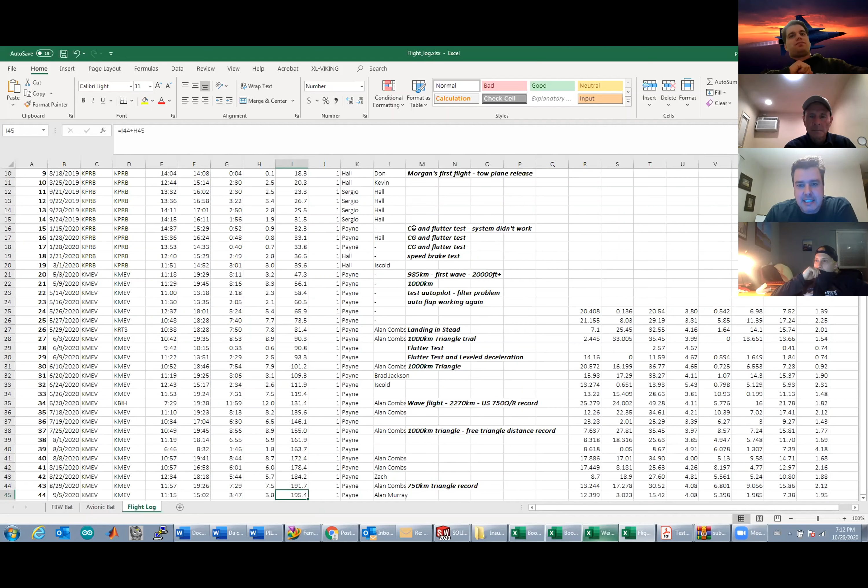In the middle of those flights, we did a lot of testing. Some tests for very specific parts of the airplane, but some just operational tests, just go fly, and having Jim try high performance flights just to see how the airplane behaves. And it was actually pretty successful.

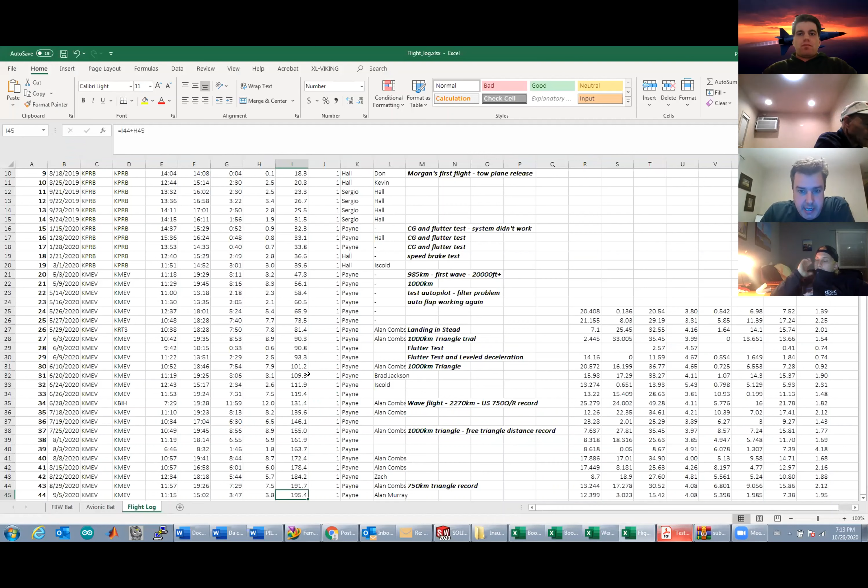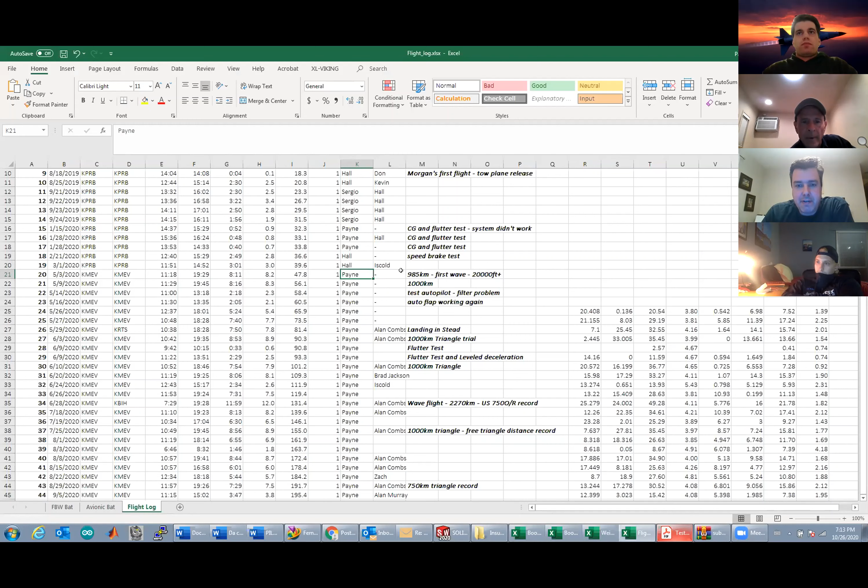The first day that I got there was actually the last flight that I did with Morgan. The first day, Jim just got a wave, and it was about a 1,000K flight, a very fast one. Then the next day he did 1,000K, not a triangle, but a normal 1,000K. Then we did a 1,000K triangle, and we ended up a little bit short, had to land at Reno Stead Airport.

That was actually very funny for me because I was always involved with race planes, and a big dream of mine was to take an airplane to Reno. So it was my first airplane that I took to Reno, not a race one, but a glider. And then a few days later, he did the 1,000K triangle, which allows you to do 3 US records.

Then a few days later, the big wave flight was actually 2,270K, but we lost avionics at the end of the flight, and we had to throw one leg in the trash because of the 5 turning points. That flight gave us a 750 out and return record. And all those records are US records for the multi-seat open class. And then later he did another 1,000K triangle, and the very big one last time was a 750K triangle. So a lot of big flights.

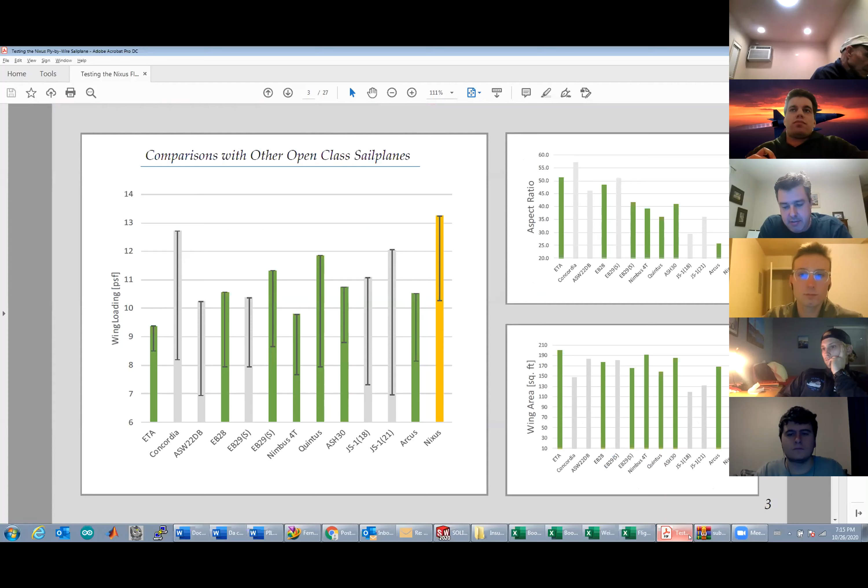But we tried to do that with as much engineering as we could use. So that's what I want to show a little bit today. If you guys have any questions, just open your microphone and ask whatever you want. Let's do this more like a conversation than a lecture. I'm gonna skip this because we just explained the project, and if you don't know the details, we can talk about them later. Let's concentrate on the testing.

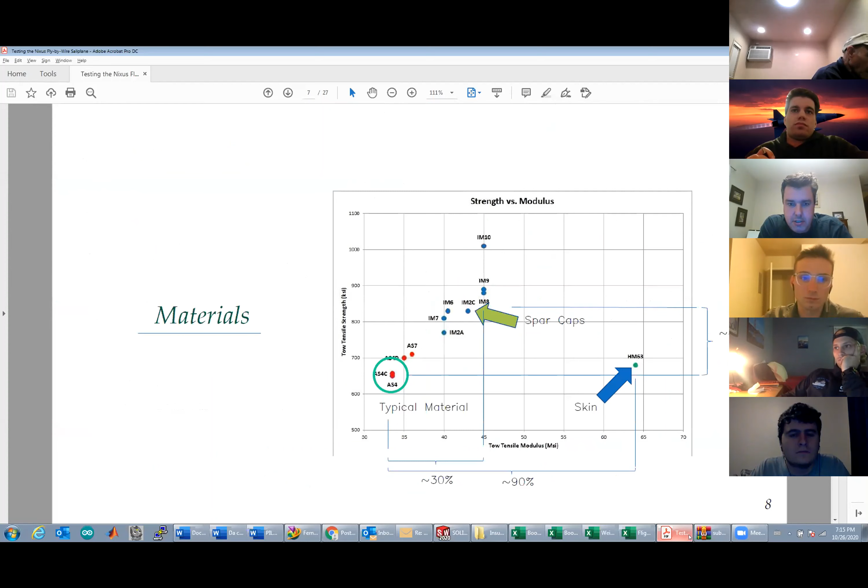And everything that's going on in those computers, I can save. So I have all the information that goes to the fly-by-wire and comes back from the fly-by-wire. All the sensors that I use on the fly-by-wire go to those computers. I have that information. So this is one of the big sources of data that I have on the airplane.

This data is being recorded at, I would say, something between 10 and 20 hertz. It's asynchronous, so it can vary a little bit. But let's say I have data here at least at 10 hertz, which is pretty good for the dynamics that we are looking for on a glider.

You can imagine a 7-hour, 8-hour, 10-hour flight. The amount of data that this generates is huge. So going back and digging into the data sometimes represents a big challenge for us.

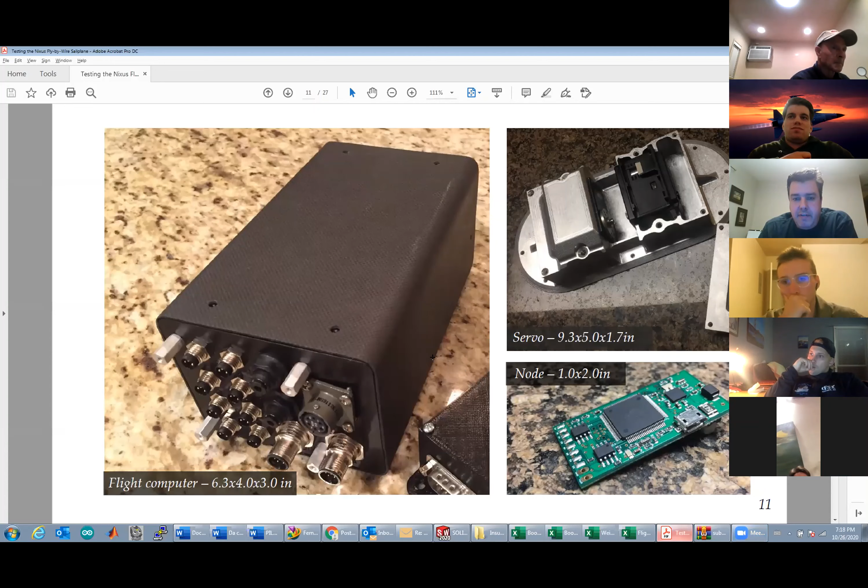I actually lost data for a very stupid reason. There is an SD card. The SD card has a file that sets the baud rate for the data logger, and I just saved the wrong file, you know. And when I lost that data, having the IGC file was very, very useful to try to reconstruct what I didn't have. So I have one flight where I had to do that, and it was very, very useful.

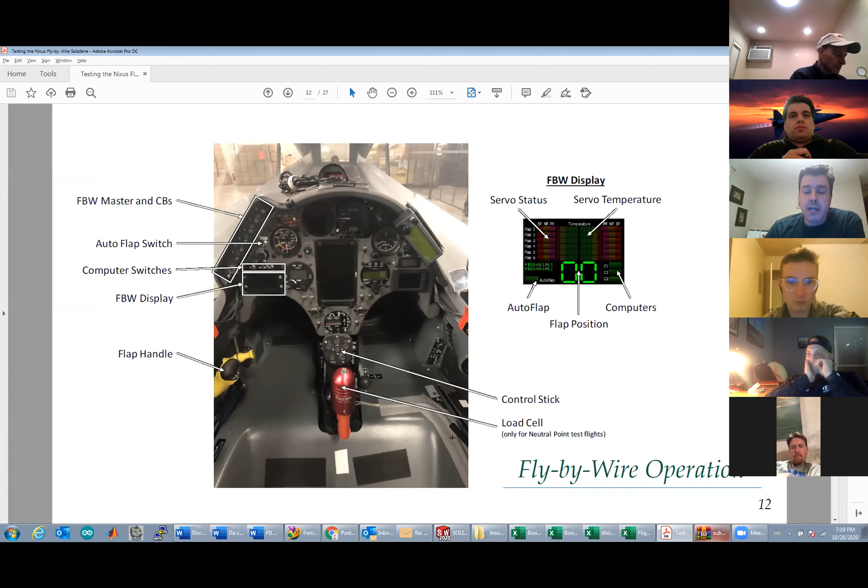And here you can see a typical testing day. Actually, this was still in SLO, but I was preparing to go fly. Extra stuff that goes on the second data logger that I mentioned is, for instance, a load cell on the stick. You can see here this red knob. It's a secondary stick that has a load cell so I can measure aileron and elevator forces. So all this goes on the second box. That information does not go on the fly-by-wire system, but instead goes on this data acquisition box that I have there.

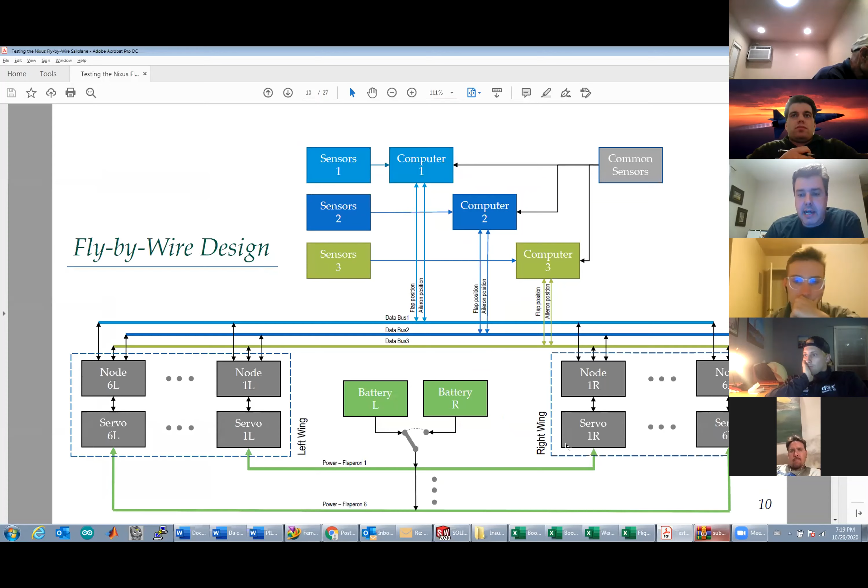Okay, so for those who never saw this, let me just change this. Let me open the PDF file actually, because then I can... not the PDF, the PowerPoint file.

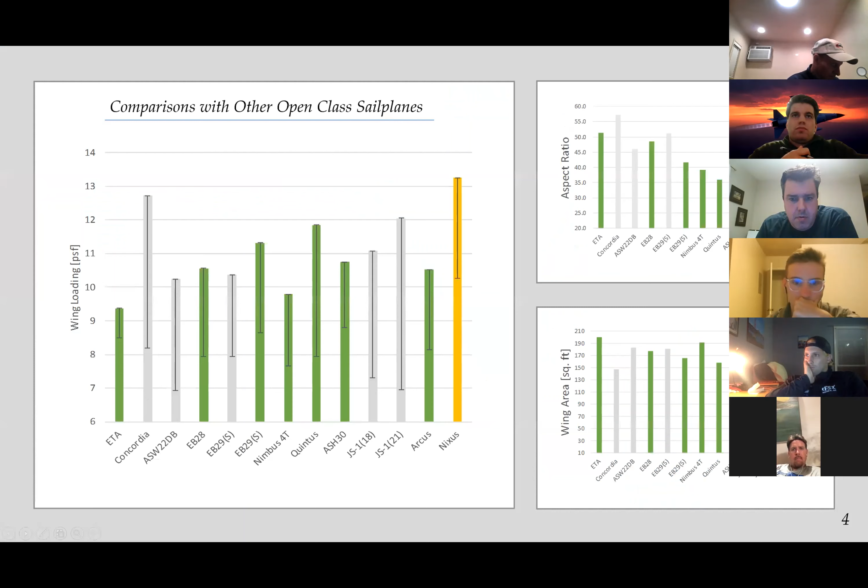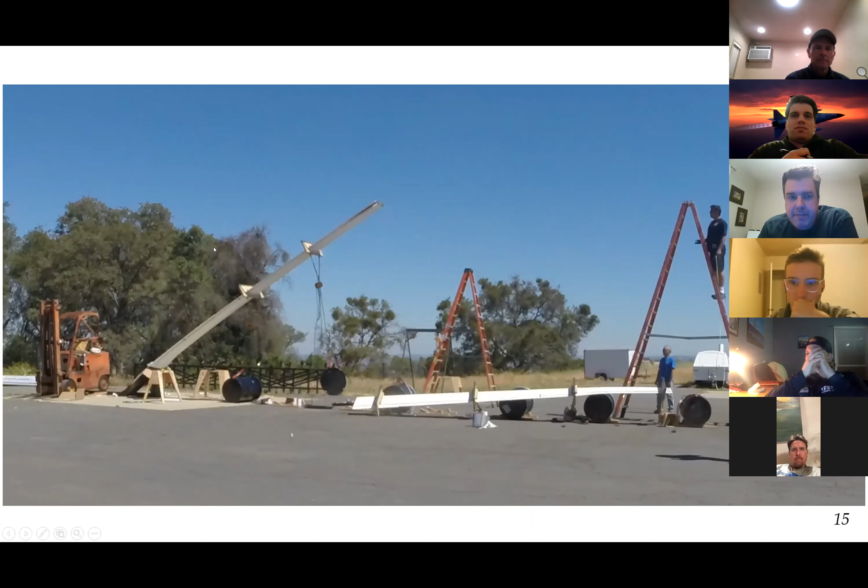For those that never saw the wing breaking, or never heard about this: I built this wing and we tested the wing, and unfortunately I broke the wing, so I had a design mistake. So just showing this, and this is when I came back to Cal Poly and we rebuilt the wing. Okay, so now let's talk about the flight.

One time I remember we gave up on a flight because we were not sure about the aileron control system, so I improved it. Then we had a landing gear failure in Castle. That was about April, I believe, or maybe May of that year. And that was the last time that we flew in Castle. After that, we moved to Minden, where we finished phase 1.

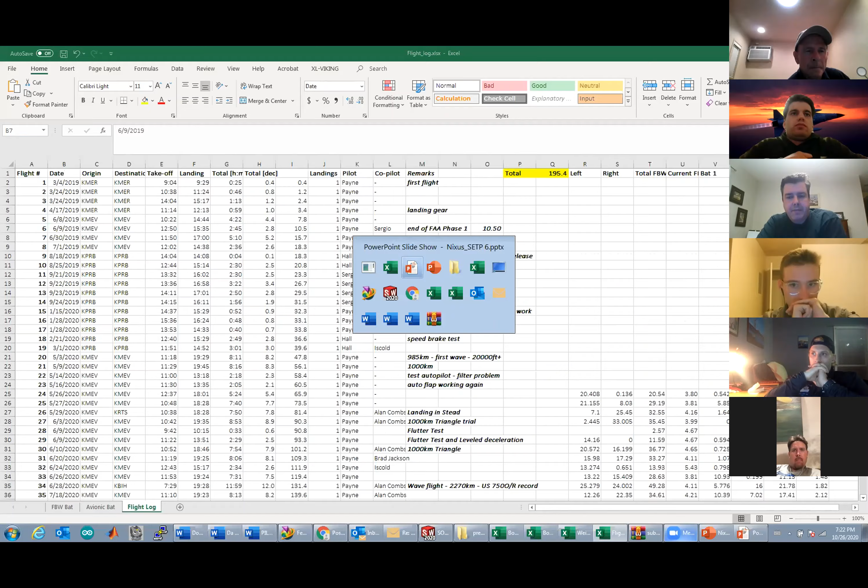And what is important to mention here is all those flights, which we can see on my flight log here, from March 2019 to July 2019, or June 2019, we had a very, very limited maximum speed. So 80 knots was the limit. And basically what we were trying to do is to achieve confidence in the fly-by-wire testing.

Hey, Paulo, I have a question. Go ahead. Where did you come up with the 80 knots number? It's based on my VN diagram, and it was a huge margin in relation to my VNE, which, based on my flutter analysis, computational analysis, I was comfortable with. Of course, on those flights we never went straight to 80 knots, but that was like a hard limit for Jim. And he approached that 80 knots cautiously. But at this phase, there is no testing to check if 80 knots will work or not. The check was, if you want to fly close to 80 knots, go do that high and be ready to get out. Cool, thank you.

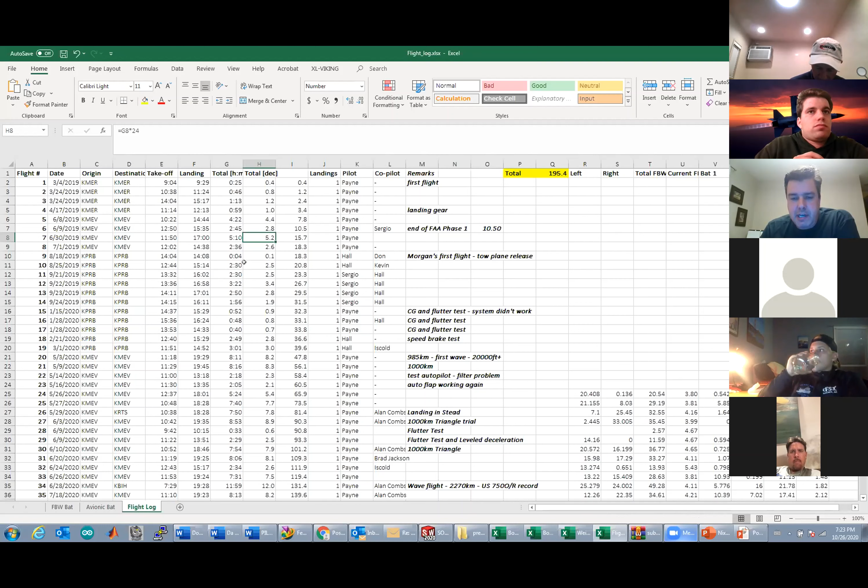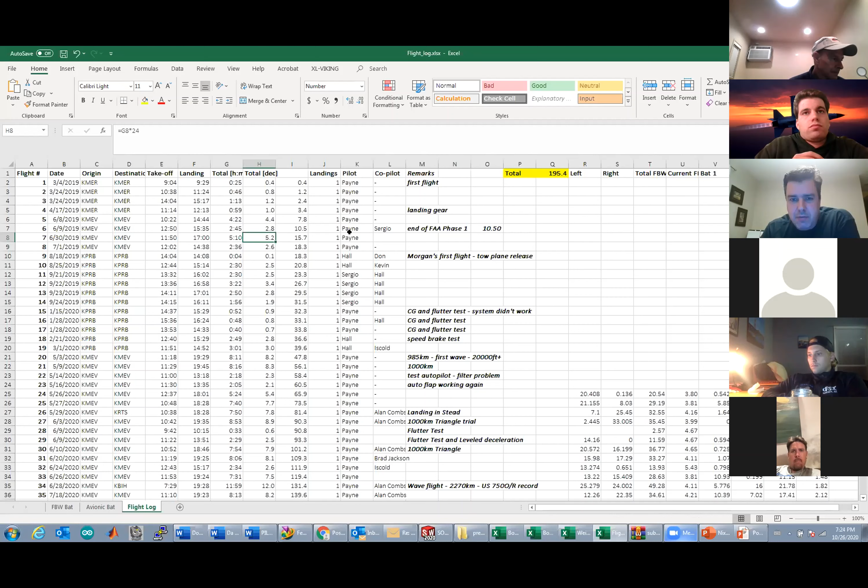So after this, just to give you an idea of how the flight test works, Jim did 2 more flights in Minden. One of those flights was kind of a long one, probably this one, a 5-hour flight, where he stretched a little bit, not in terms of speed, but in terms of distance and getting comfortable to get out of the safe cone around the airport. And so this was an important flight for us to build confidence on the fly-by-wire, measured power consumption, and that type of thing.

And then Morgan started to fly at the end of August, the start of September. And then we had a series of 5 flights with Sergio, the owner of the project. At this point, we kind of stopped. That is September 2019, and we only started to fly again in January 2020. So during this time, I did a lot of small improvements on the glider.

And when we came back to flight, the first thing that we did was a CG test that I will talk about, and the beginning of the flutter test, okay? And I will talk a little bit about what this flutter test is. But this is just to give you an idea that it's almost 9 months making 14 flights, which seems a very small number of flights, but trust me, it's a lot of work and a lot of small details here and there that I had to fix or adjust or improve to make the glider ready to actually test and perform.

Oh, and one of those tests, Zach was there with us, was the ground vibration test that happened in October and beginning of November at ATA. So in this test, the idea is, for those who don't know, we have a structural model that we build for this glider. And the structural model is able to determine the natural frequencies of the structure. So if you put the structure to vibrate, what is the frequency that the structure vibrates?

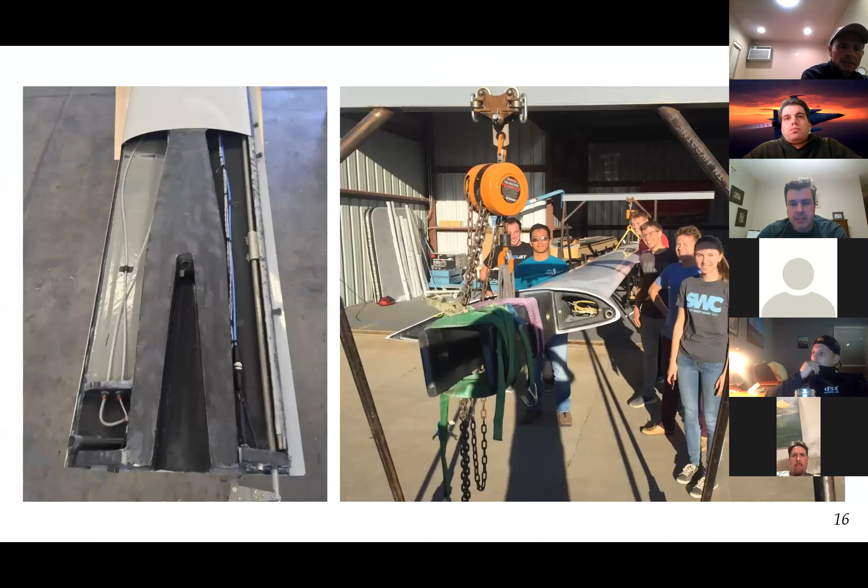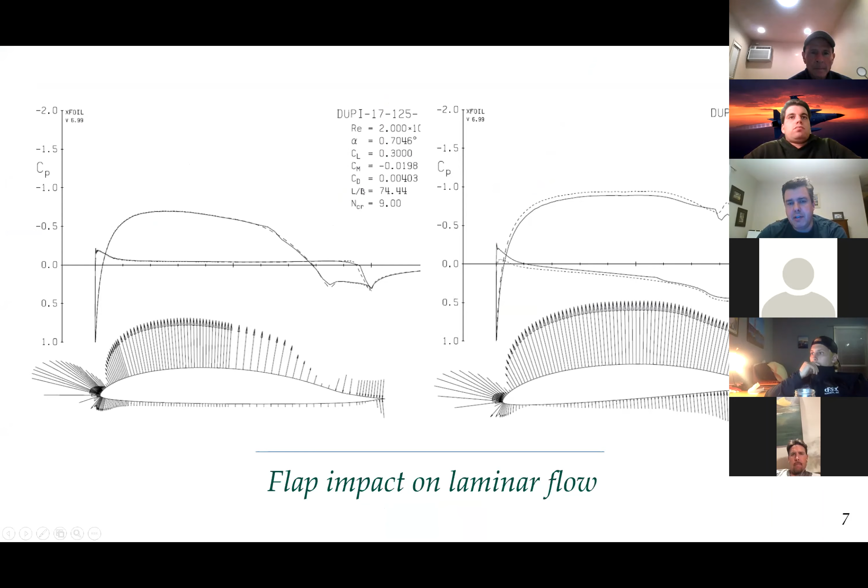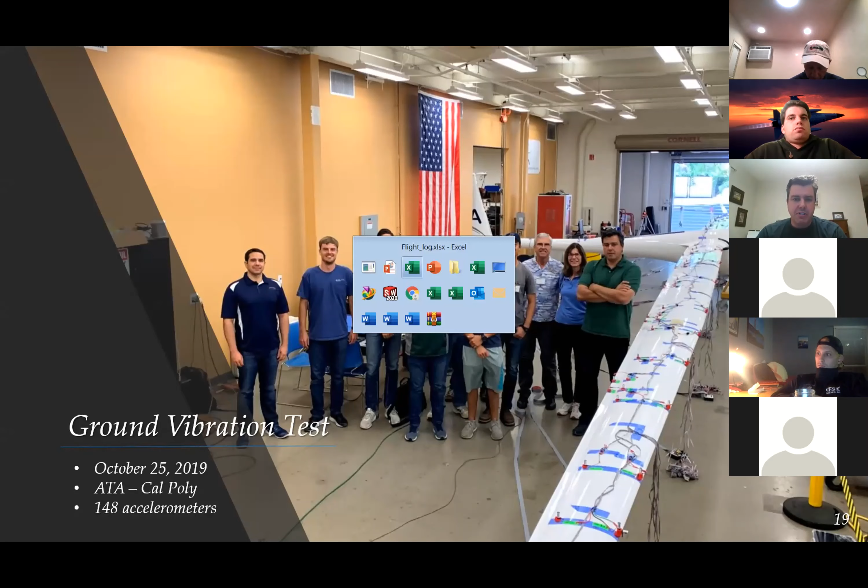is the flap deflection is based on lift coefficient. And to calculate lift coefficient, I need to measure the acceleration of the airplane. So when my airplane is vibrating here on the bungees, the acceleration is changing. If the acceleration is changing, it means the flaps are moving. So if the flaps are moving, my frequency response will be different.

And we measured that, and you see a small difference in some modes, but in general, it's not big. So this is not really significant for us. The amplitude difference is not very important. Frequency differences are the ones that are very, very important for me.

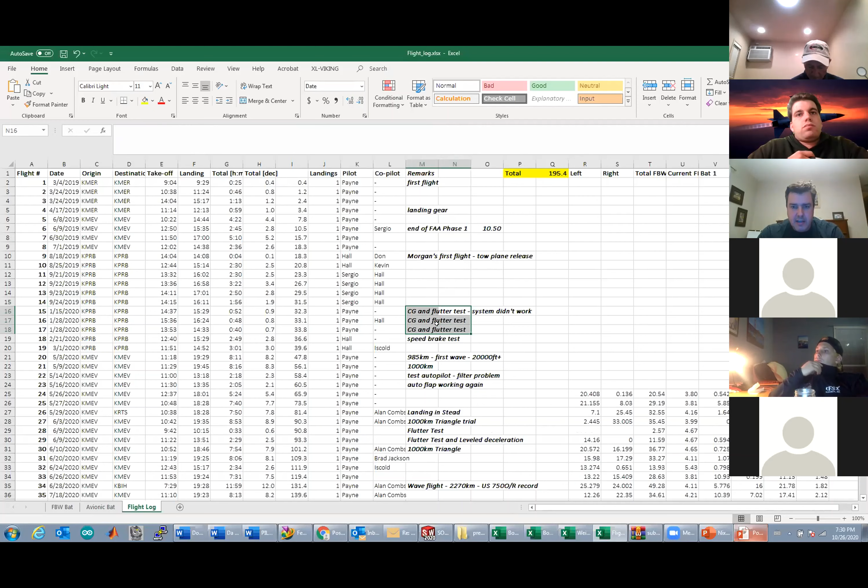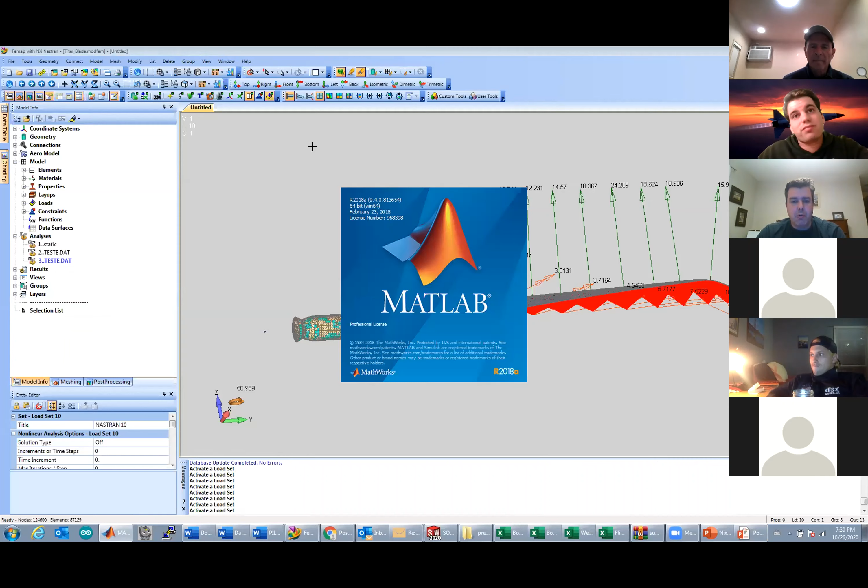Okay, so we did this in November, and then we went to fly again. And when I told you that on those slides here we're doing flutter tests, the goal for this is now to measure the vibration in flight. Okay, so let me jump to this chart here. Actually, let me do this more. Let's open MATLAB and do real life stuff here. So I will show you what is the result of a flutter analysis, okay? And then I will explain how I measure that in flight.

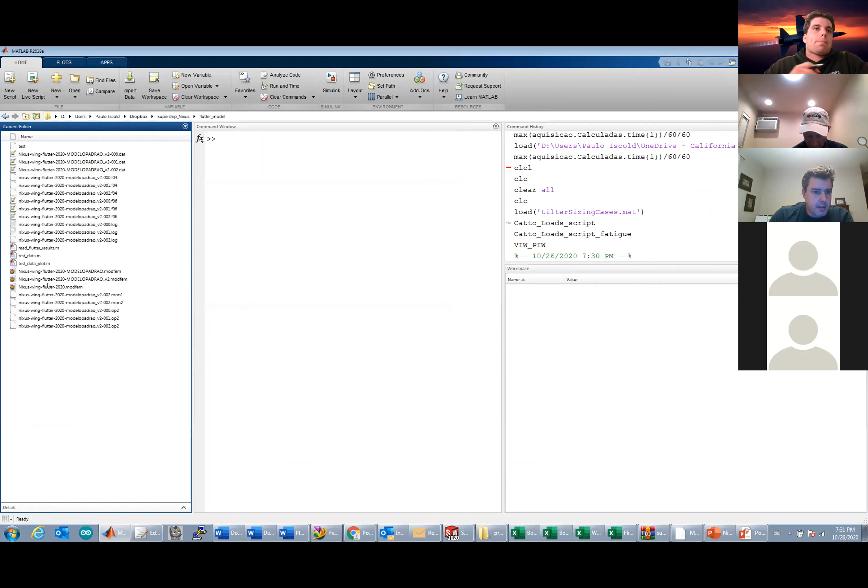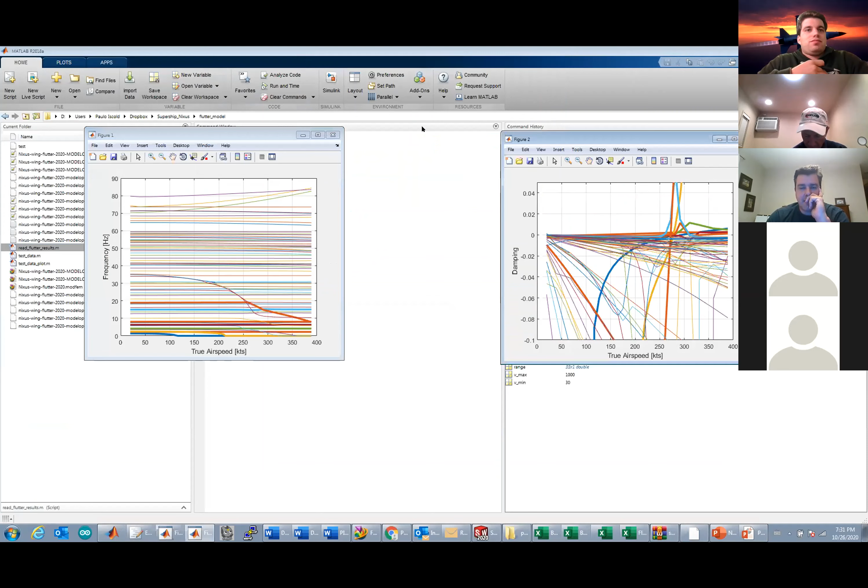So if I go here to my Supership Nixus, okay, this is the typical result that I get out of a flutter analysis. It looks like crazy stuff, huh? Look at this chart. Can you read something on this? Nuts, I know. So what is the idea? It's actually very, very simple. After you understand what it is, it's super simple.

So this chart first, okay? This is frequency on the vertical axis and true airspeed on the horizontal axis. So if this goes all the way to 0, the frequency that you see here is the natural frequency of your structure. As you start to increase the speed and the air starts to produce some force on the structure, those frequencies start to change, okay? And you can see really clearly that there is a frequency here that kind of drops a lot until it hits another one, and then they kind of diverge. This is where flutter probably is.

What happens here is, imagine that your wing can flex like this and can twist like this. If those two movements, flexion or bending and torsion, are happening in different frequencies, there is a very low probability that when your wing is going up, it's also pitching up. Because if it does this and pitches up at the same time, the load is increasing as the wing pitches up and wants to bend up the wing even more. And this is what flutter is: the self-excitation of your structure.

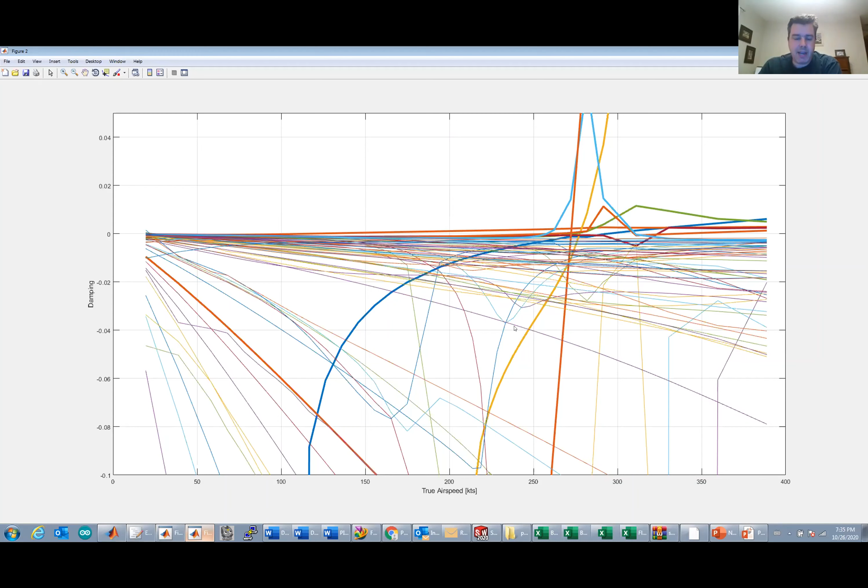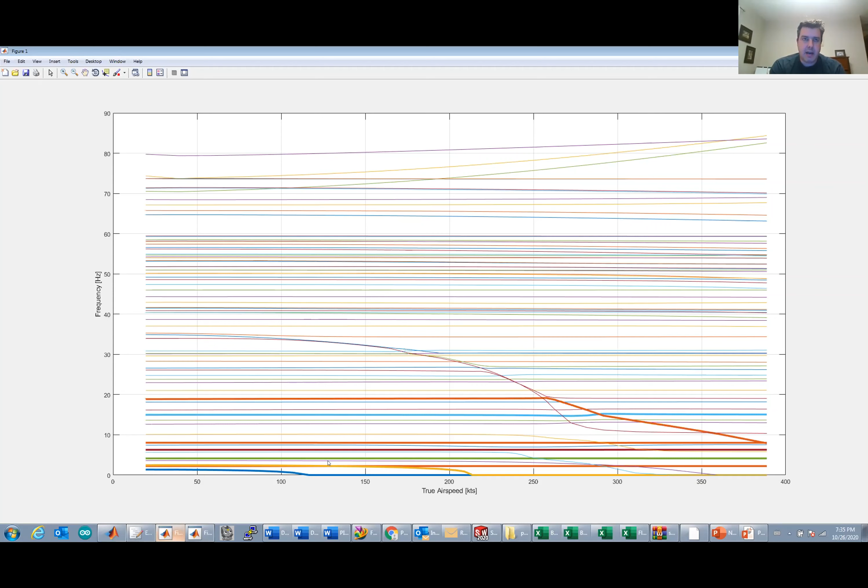Measuring damping is more difficult than measuring frequency. It's all about how much noise you have in the signal and how you deal with the transformation between the time domain and the frequency domain. So I must confess, I'm still learning how to do that. I tried to do damping, I could not.

A few days ago, I was contacted by a person, and I knew that person had published an article about Flutter. My contact with this person was completely out of the blue, not related with Nixus at all. So I went to this meeting, and he told me he did publish an article about Flutter. I asked for some explanation on how he did this, and he told me. So next time we're going to test, I'm going to try that.

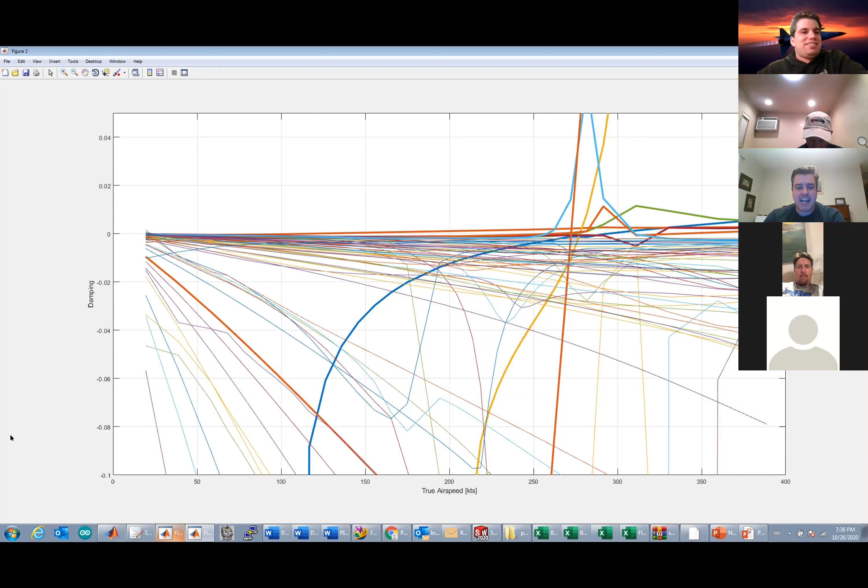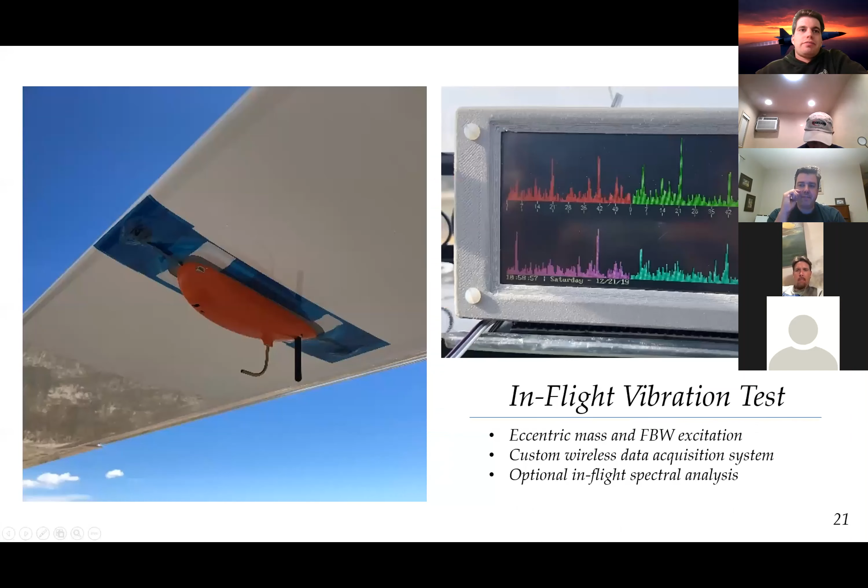But what I'm doing right now is just looking for the frequency. So now, how did I do that? Is that measured data you were plotting there, or is that from FEA? No, this is all FEA data.

So now, how am I going to do this measuring? Nixus had a very challenging configuration: a very small wing, very little access panels inside the wing, and very long. So if I want to do a data acquisition on the wing, it will be really hard to run cables on the wing. I tried many times. I went to Scaled Composites and asked for help there. Those guys were very helpful, but it was complicated to get access to their system because they're busy with other projects. So I said, you know what, I better solve my problem by myself, otherwise I will never solve this.

So what I did is I built this little device that goes inside a 3D printed pod that I can just attach to the wing with tape. This device is a simple Arduino reading 2 accelerometers, one on the leading edge, one on the trailing edge, collecting data really fast, about 250 hertz. I bought a little radio, that's the beauty of being in the United States, you just go on Amazon and buy that stuff, and it comes to your house. Try to do that in Brazil, it takes like 5 months and 78% in taxes. So I just bought that thing, a little radio to send the data to the cockpit.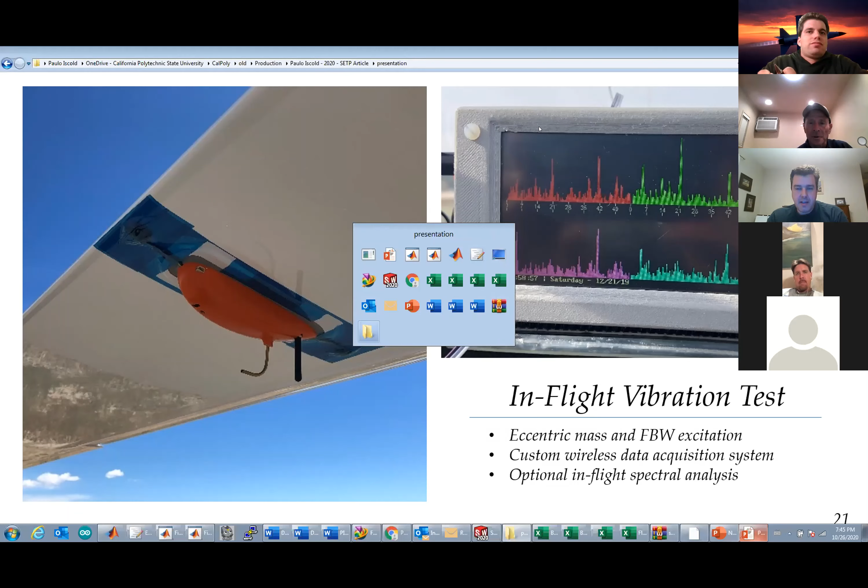Okay, and one more. Go ahead. I just, out of curiosity, since you're fraternizing with Jim Payne and Morgan Sandercock's capability to excite the wing of Perlan—you couldn't do that with Nixus because out on the tip you didn't have access to it really. Morgan embedded his in the wing, and he did quite a bit of ingenuity to get that flutter tester on the Perlan. I just wondered if it was applicable for you.

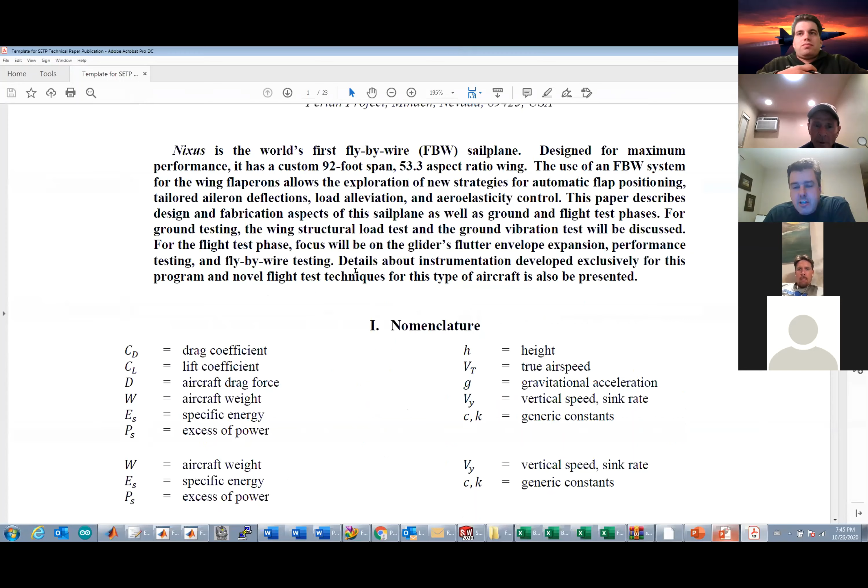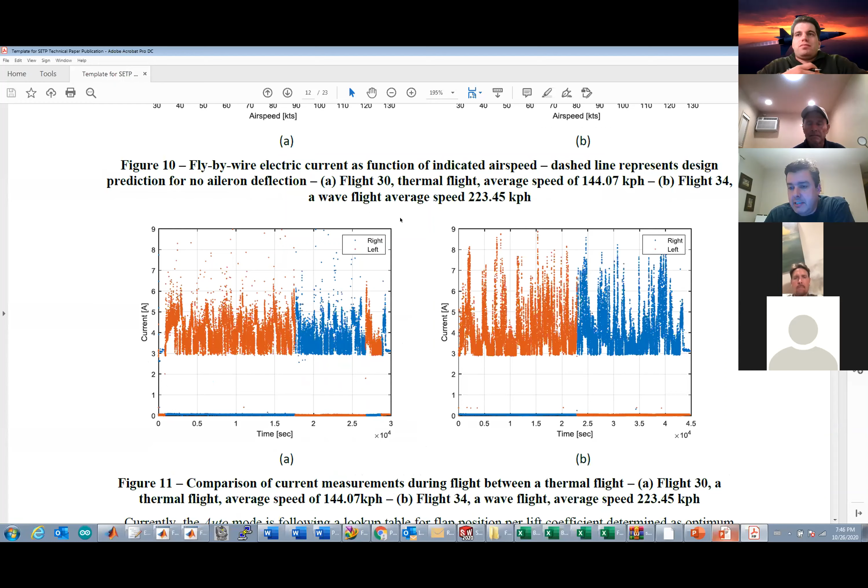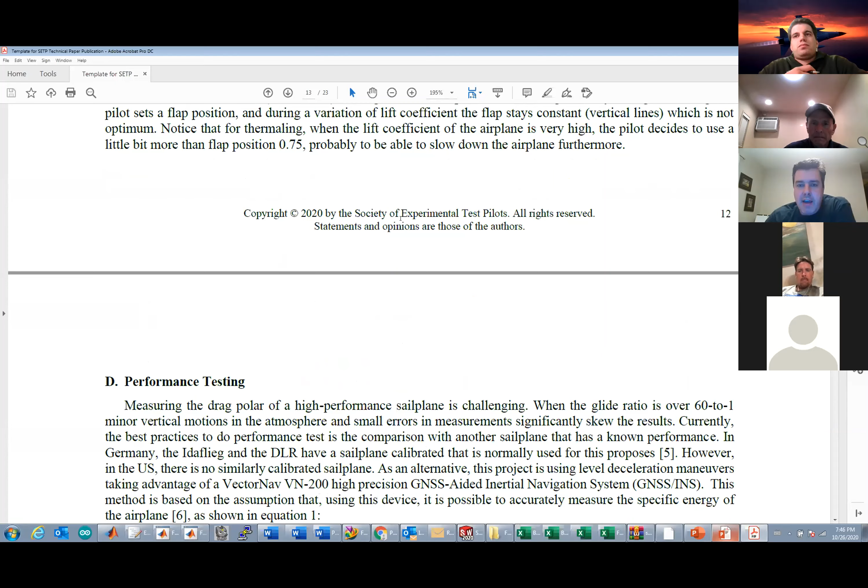So my first approach was to call Morgan and ask about his system. That was the first thing I tried, and it was too big to fit inside Nixus's wing. Morgan also needs batteries inside to power his system, and he needs to run wires—it's a wired data collection system. I could not run more wires inside the wing, not because they don't fit, but because the wing is closed, so it's hard to run wires inside. That's what drove me to build the wireless system, to avoid having to run wires inside the wing.

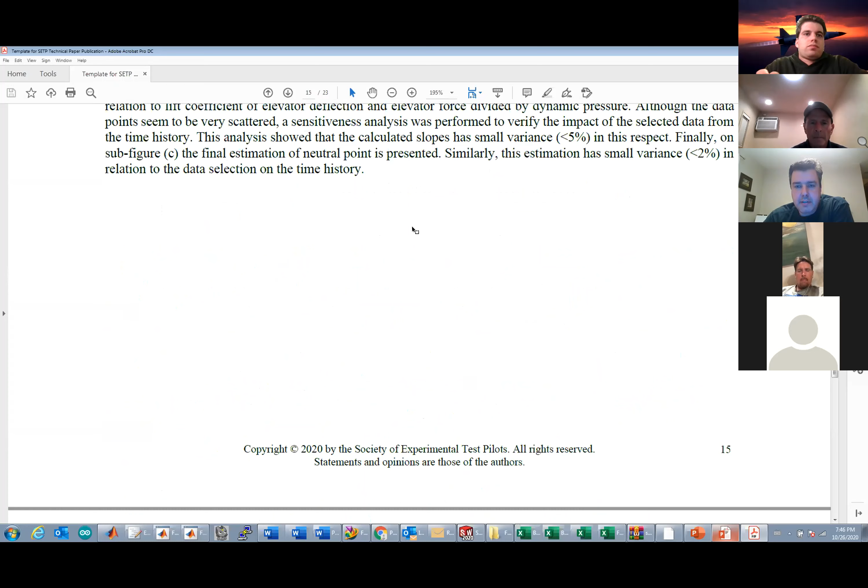Was there any worry that the wireless system's mass out on the wing might change the vibrational modes? Well, the wing weighs 300 kilograms, and that system weighs about 10 grams. So it changes things, yeah, but not significantly.

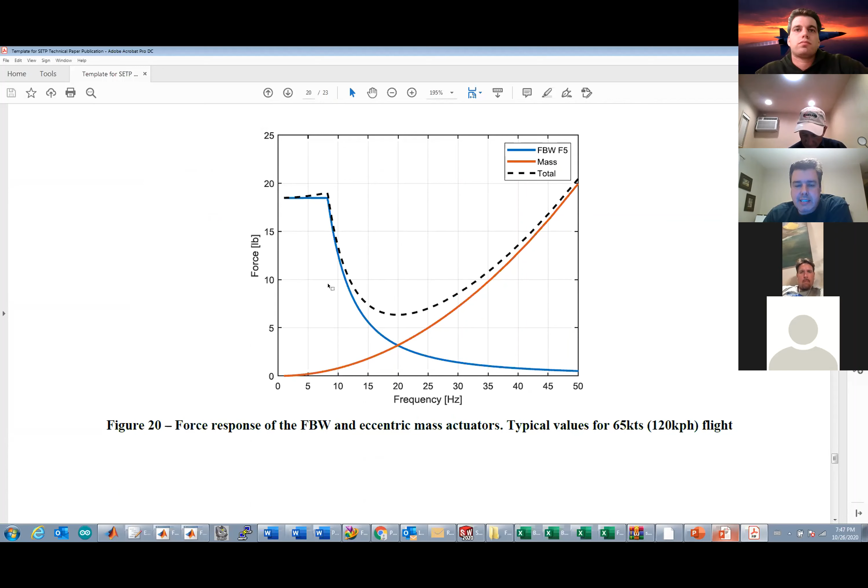And this is the force, the excitation force produced by the mass, and the excitation force produced by the fly-by-wire, and how they combine to give me enough level of force to excite the wing. So everything above about 5 pounds I can measure.

Okay Paulo, go ahead. One of the tests we did back in January was a level deceleration test. What were you looking for with that test? Okay, let's talk about that one.

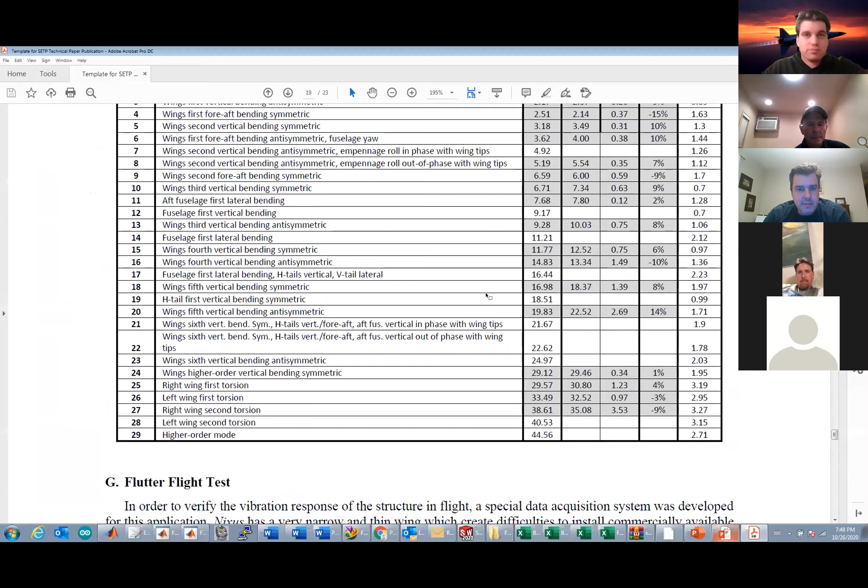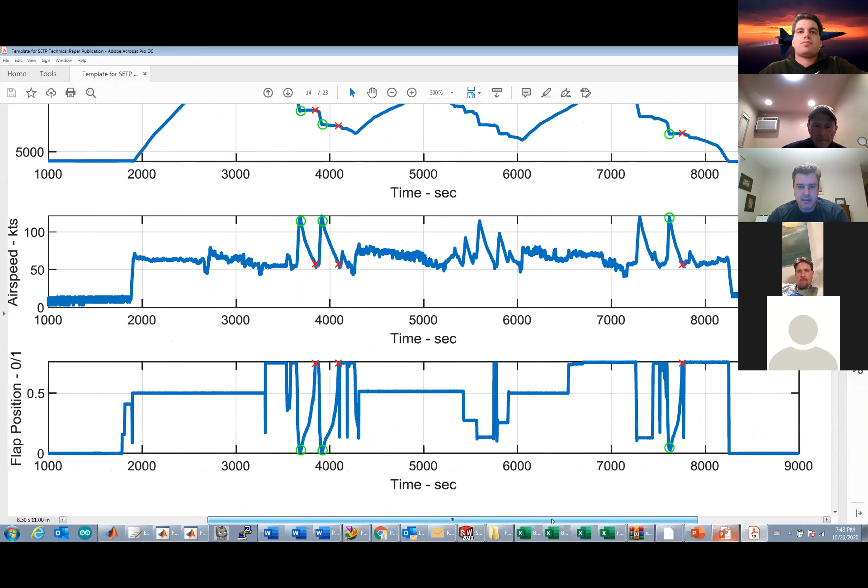So we're doing the performance analysis of the glider. What is the idea? Let me go back here and show that. I hope you guys can see this plot, the lines are a little bit thick.

But what is the level deceleration? This first chart is time versus altitude. So the glider took off, was towed, climbed, switched on the engine, climbed a little more, went really high, 10,000 feet, and then started doing some testing here. At some point you see it dives like crazy and flies level. Why is he diving like crazy?

What is the only thing on a glider that makes kinetic energy reduce? Drag. If we didn't have drag, you'd keep your kinetic energy forever if you don't climb. So if the atmosphere is completely calm, and I can measure how fast he's decelerating, I can calculate what the drag is.

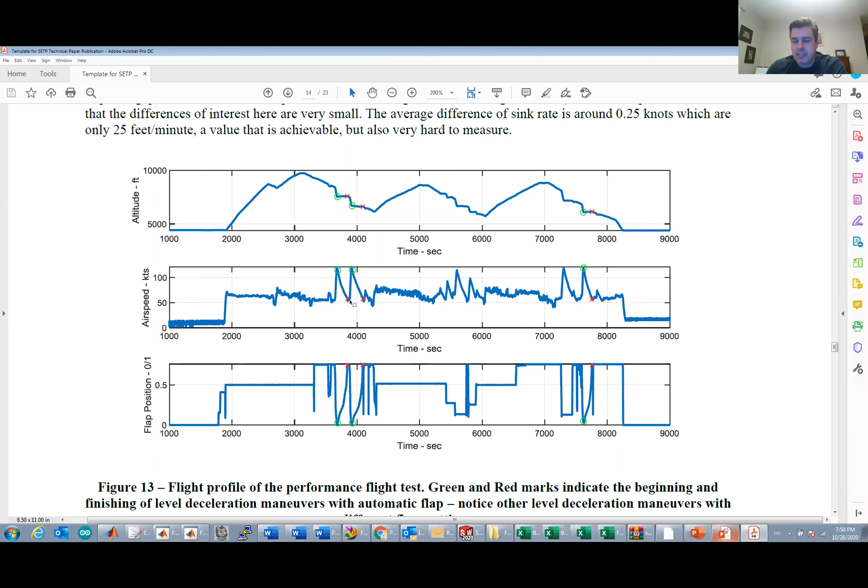I'm going to go a little bit into the math of this because it's actually very simple. The total energy of a glider is potential energy, which is mass times gravity times height, plus kinetic energy, which is half of mass times velocity squared. Divide energy by weight, and you get what I call ES, specific energy — potential energy divided by weight, plus kinetic energy divided by weight.

So agree that energy is force times distance. If I divide energy by weight, I'm getting force times distance divided by force. Weight is a force, so specific energy has units of distance. And we actually use this as a height measurement.

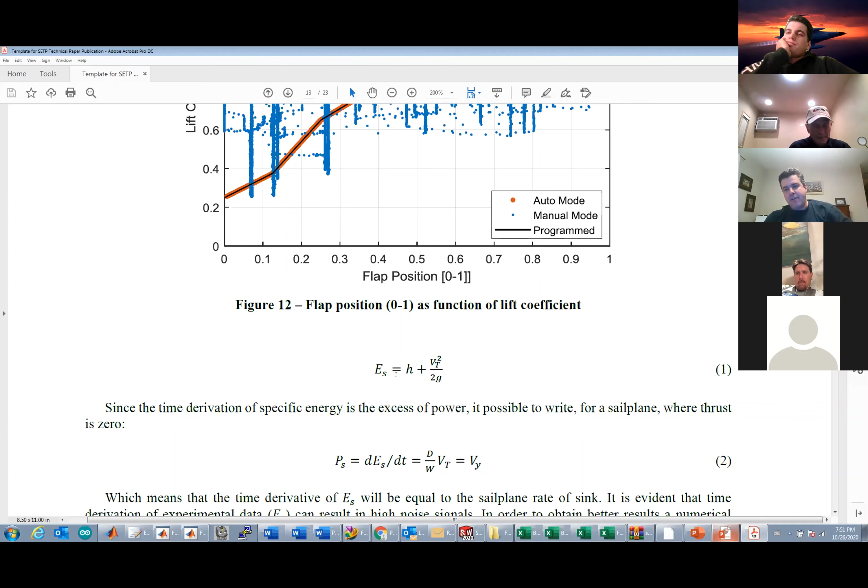If I take the derivative of this over time, I now have variation of distance by variation of time, which is a velocity. What is this velocity number now? It's the variation of your height, which you can prove is exactly your sink rate.

So that's the level deceleration technique we're trying to use to measure the drag polar of a glider. We have a way on a glider to measure height and true airspeed very precisely. The height we measure with a high performance GPS — we could use pressure if we knew the pressure variation in the atmosphere, but for now we're using GPS.

For true airspeed, I use two techniques. I either use a high precision GPS and correct with the wind speed that the LX is calculating, or I simply get the airspeed indicator from the LX and calculate true airspeed from that. Those are the only two things I need to measure.

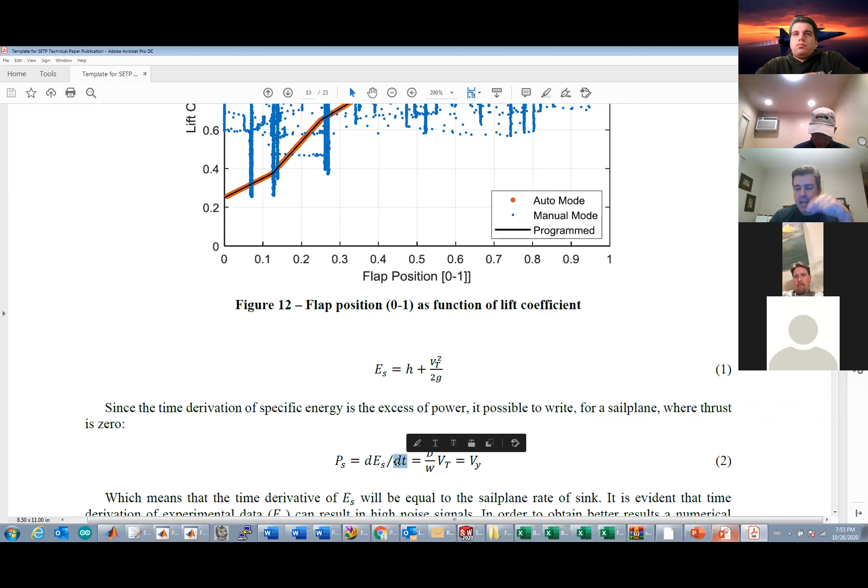Then I need to do the numerical derivation of this energy in relation to time, which is a little tricky because every time you do a derivation on numerical data you get a lot of noise. But we did some math — I won't go into the details right now — to fit some polynomials, since we expect a drag polar with a parabolic shape. So if the drag polar has a parabolic shape, what is the shape of the speed polar?

So we use that and we can do the derivation on a polynomial, which is smooth and has no noise. And then what we get out of that is results like this, okay?

Hey, Paulo, do you have any comparison of sawtooth descents with the level decels? No, I don't have. The sawtooth descents, the problem is you're going through the atmosphere. So the atmosphere might be changing as you come down, especially close to the ground. The advantage that we see on the level decels is the atmosphere that you're flying is pretty much the same all the time. So you don't need to worry about that. Make sense? Yeah, that makes sense. Thanks.

So what you see here is the speed polar for Nixus. Okay, so that's the first time that I published those numbers. Black line is my prediction with a perfect glider, no cracks, no gaps, nothing, no tape. So if we can get there, I'm really, really happy. The blue, the yellow, and the orange line are measurements that we did with this system. And the dashed line is the average of the measurements, okay?

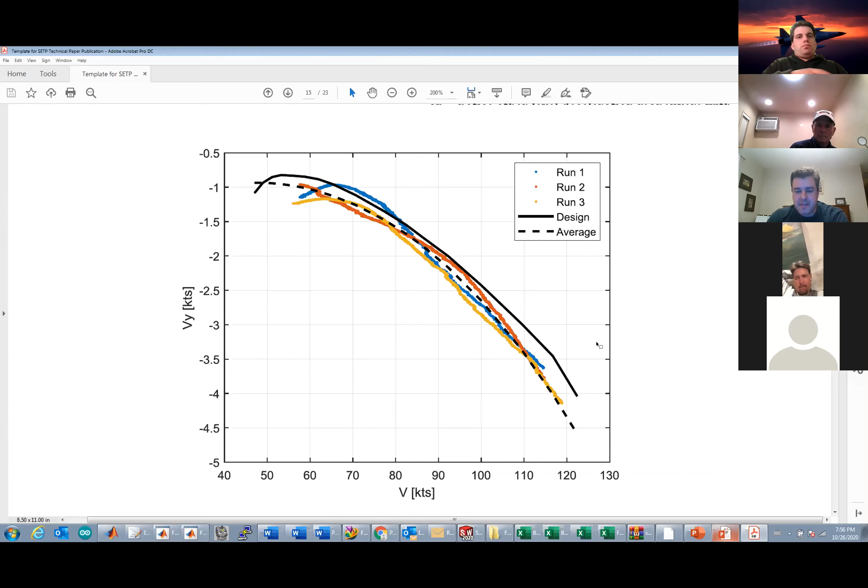There are some questions about if I should get more flap deflection to get at lower speeds here. There are some questions about the mylars that we're trying to investigate, if the mylars stay attached or not. There's some finishing work. But just to give you some perspective, we're talking about measuring here. So at high speeds, we're talking about 0.5 knots of vertical speed. So try to measure the drag force to accomplish this. I'm talking about less than a pound of drag force that I need to take out of the glider. And that's where it becomes really challenging. It's so sensitive to everything, including atmosphere, that it's kind of hard to be consistent on that.

Paulo, have you guys planned any sunrise or sunset flights to take out the atmospheric noise? This flight was 10 minutes after the sunrise. So if you look at the takeoff time here on my flight log, 6:46. Yeah, you can't do much better than that. No, unless we go illegal.

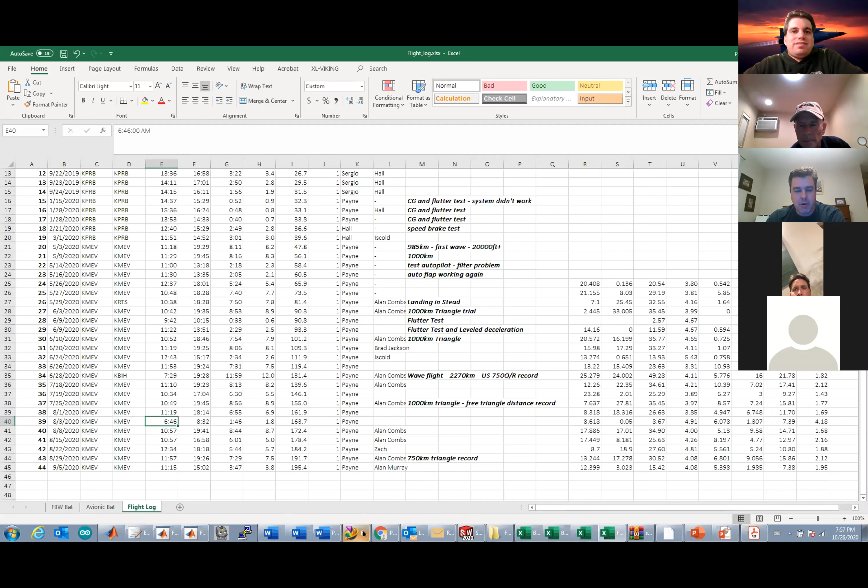Yeah. And did you see the altitude that we did the flight? So he towed up to 9,000, and then he switched on the engine and went back up to 10,000. Sorry, maybe he towed up to, yeah, I think it was that, 9,000, and he went back. So we did those very high flights to try to do that. We had this one that was not really high. But yeah, we are trying to do that.

The other option, Troy, is to go really close to the ground, because then the atmosphere over the runway is probably calm there as well. But we're just not brave enough to dive Nixus at 140 knots close to the ground, and then, you know, slow down and land. That's prudent. Yeah, we're not taking that risk.

Well, I can say from experience that the level decel test is one of the most impressive things you'll do from a piloting perspective, because you get it ripping at 140 knots and then you level it off and it just goes and goes and goes. I mean, I think we leveled off over Paso, over the airport, and I think we ended up finally turning around for another run, and we were out by Bonnell, which is 4+ miles away. So you got to have a lot of flat terrain away from the airport if you want to do that down low.

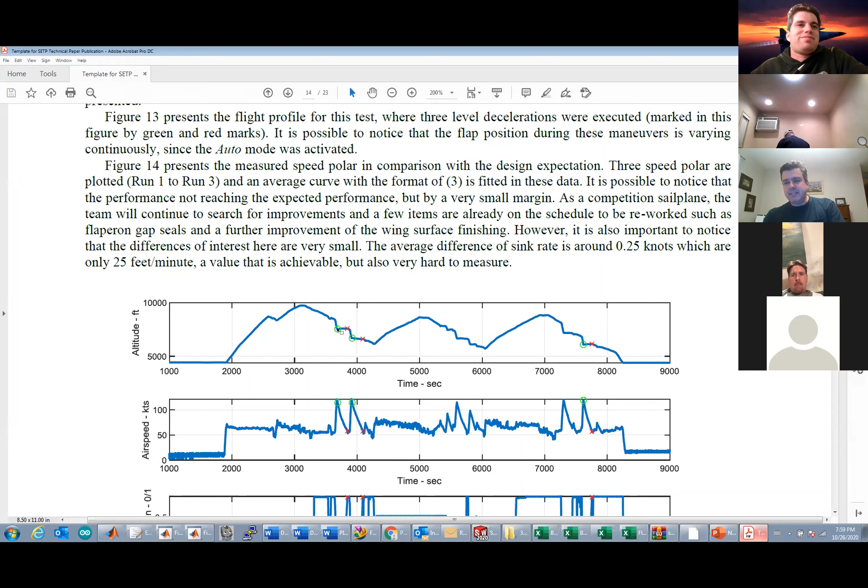You typically do the opposite of that with aircraft. You do a level accel to get the drag polar. So that's really interesting to do it backwards. Yeah, so the inspiration came from the level acceleration. But with the glider, there's no way to accelerate the glider. That's why we're doing this. I have a document here with the time that it took to do this. Well, I remember something like over 3 minutes to go from 140 knots to stall speed. Yeah, that feels about right.

I have a quick question. Go ahead, Will. So in some of my reading about the way Akaflieg does their testing, I've read that they specifically do it with a comparison glider, because they're worried that things like high pressure or low pressure systems could have the atmosphere moving at, you know, very small but consistent rates and affect the data. Did you look into that at all?

Well, here in the US, we don't have a calibrated glider. So that is an issue. Yeah, the DLR has that calibrated glider. Don't ask me how they calibrate a glider, because I'm pretty sure that's another PhD to do that. But the goal here is we don't have a calibrated glider, so how to do that? And I agree, the atmosphere has a huge impact on this. But when you're repeating the test multiple times with different times and you get the same result, I think that's good enough.

You had something to say, Troy? Yeah, I recall taking the courses at NTPS. We had temperature and pressure correction techniques, but you need to measure that stuff accurately while you're doing the test to make those corrections. Yeah, but the beauty of this, I don't need any correction for temperature here. The only correction that I need for temperature is to calculate true airspeed, and we do have good temperature sensors on the glider because the electronic total energy variometer works based on those. So we're using that one, but despite that, it's just measuring specific energy and that's it.

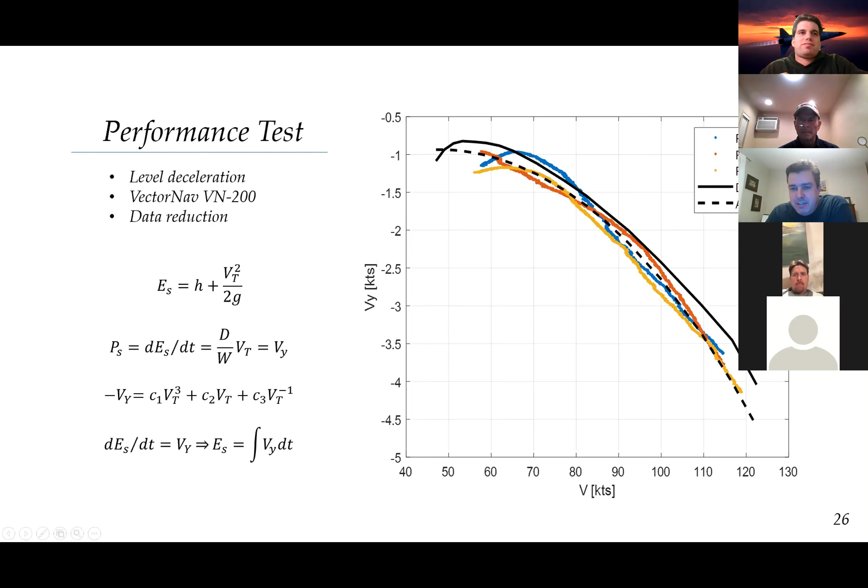And the other thing is, no matter how many times I measure this, what really matters is just go fly. And Sergio, the owner, was like, oh, we need to change this. I said, Sergio, first year of the glider and 5 national records, 2,400 kilometers. Why measure this? Just go fly. It's performing well. And a bad pilot decision will compensate for all this, or vice versa. A good pilot decision will make it better. There is a point that as an engineer, I want to measure this precisely because I know every time the glider is different and there's a lot of stuff.

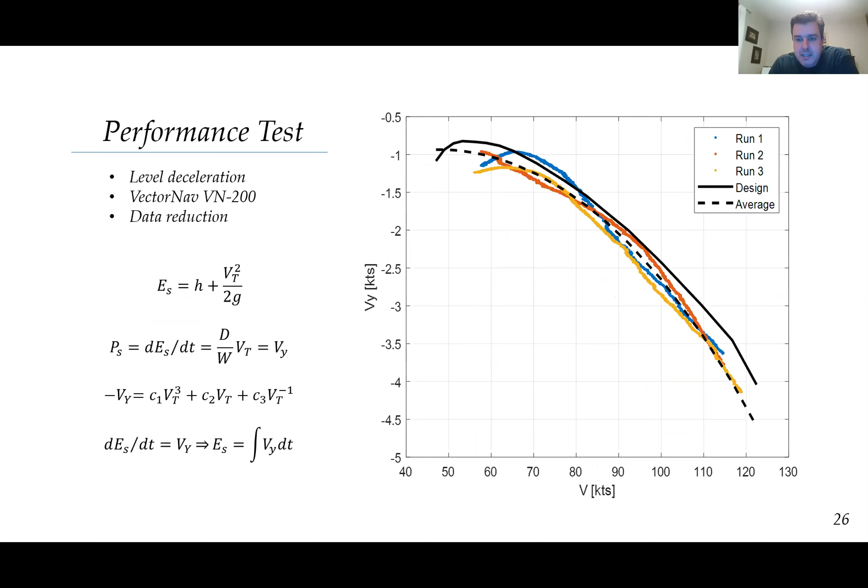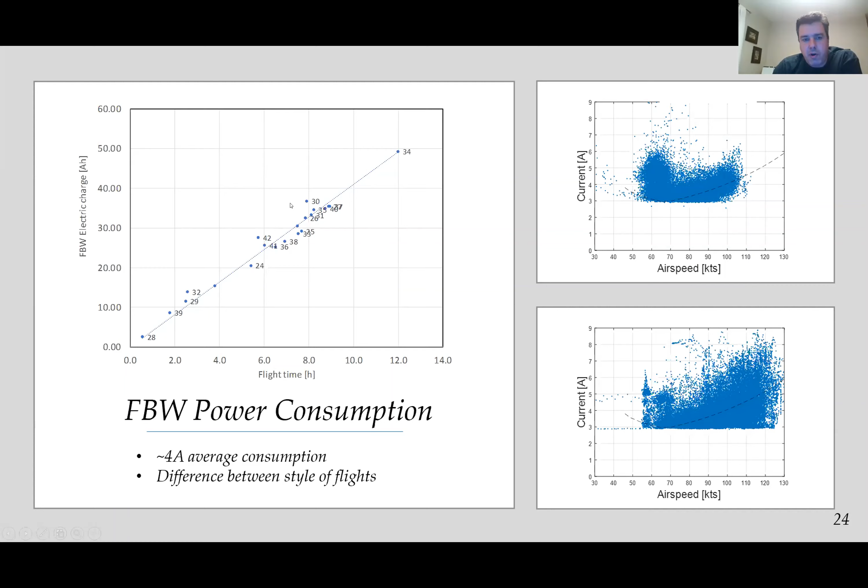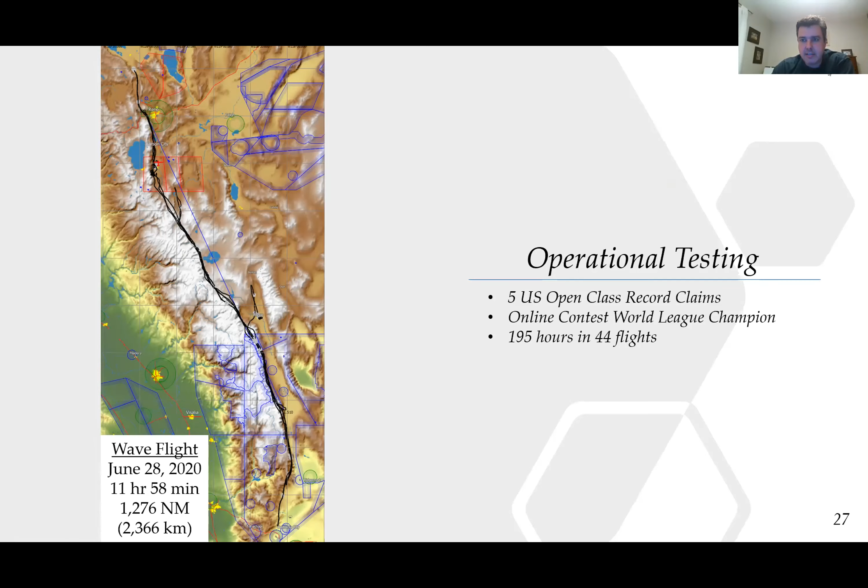And I think that's it. That's what I have to show you today. I hope to give you, for the Cal Poly students that are joining Akaflieg, a good taste of what we could do next summer.